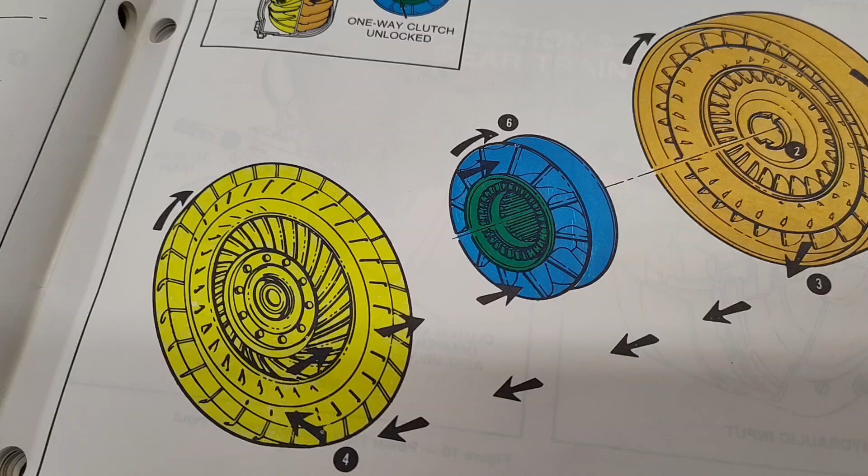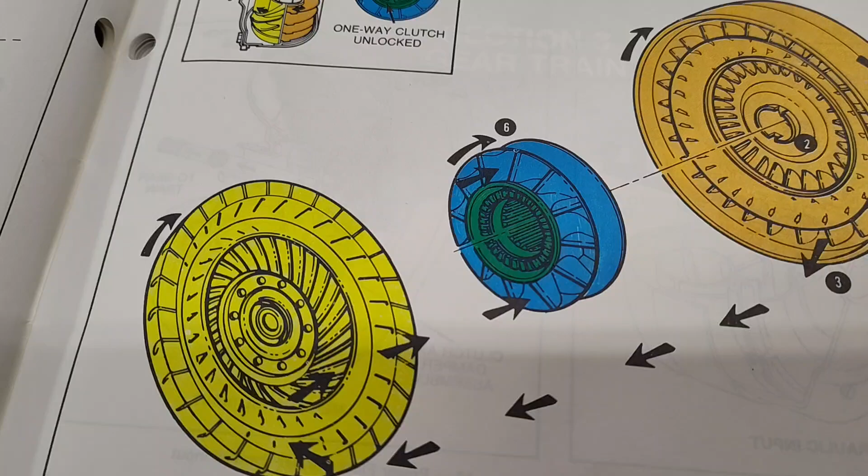This is a complicated subject, and I am honestly still learning things to this date. I did a little bit of quick math thinking about this. I was curious how many converters I've built to date. I don't know how accurate this is, but it's pretty close. I've built about 1,872 converters, which sounds like a lot, but it's not a lot compared to shops that just turn these things out, that's all they do. But I'm not just a converter builder, I'm a transmission builder, and I do valve body design and things. I do a lot of different things.

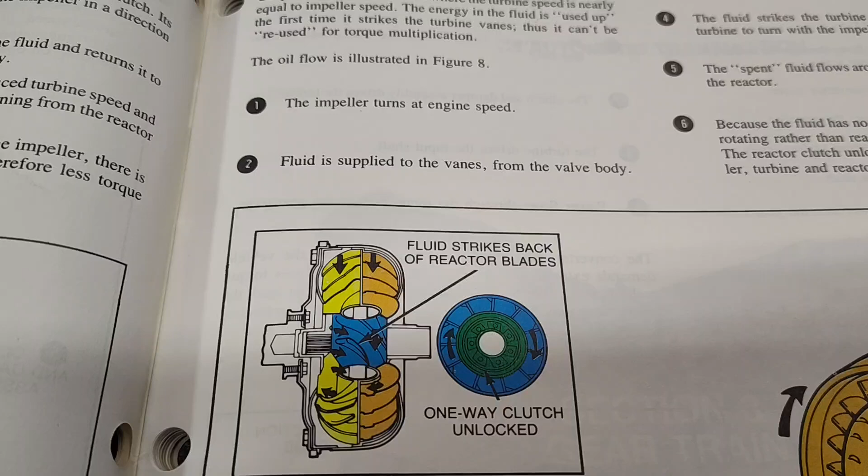Anyways, the point is, I think myself and many people in the industry are still learning. So there's going to be several videos on this as time goes on, but today we're going to focus on the fact that a torque converter is a fluid coupler.

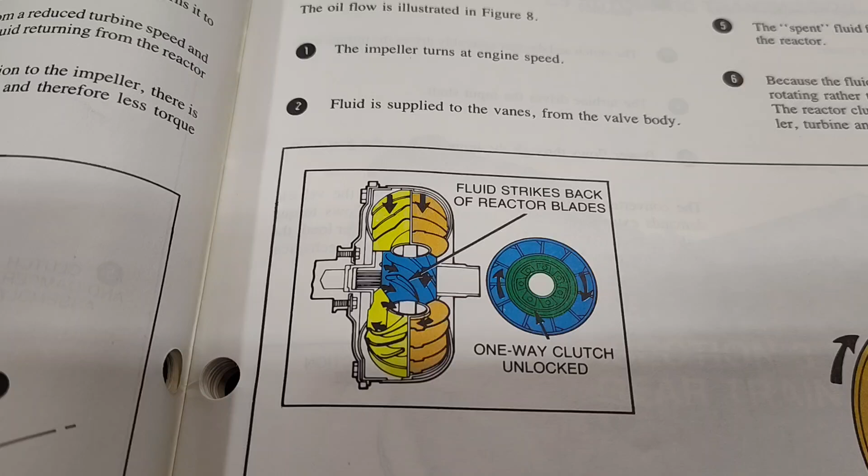So what that means is it's using the fluid to basically operate the torque converter. So what we have to understand is the fluid matters, and I'm talking temperature of fluid, viscosity of fluid, pressure of fluid within the converter.

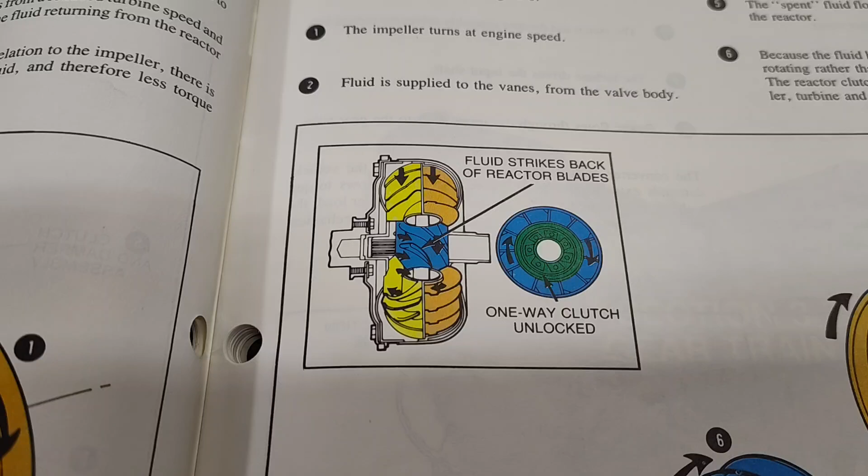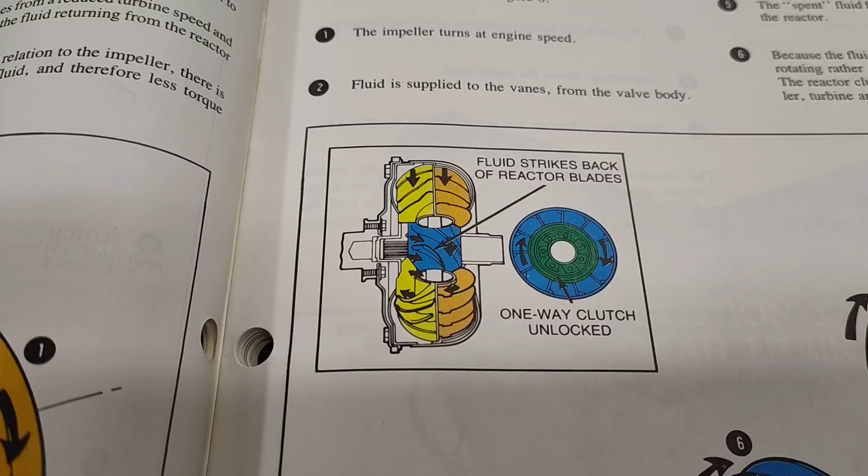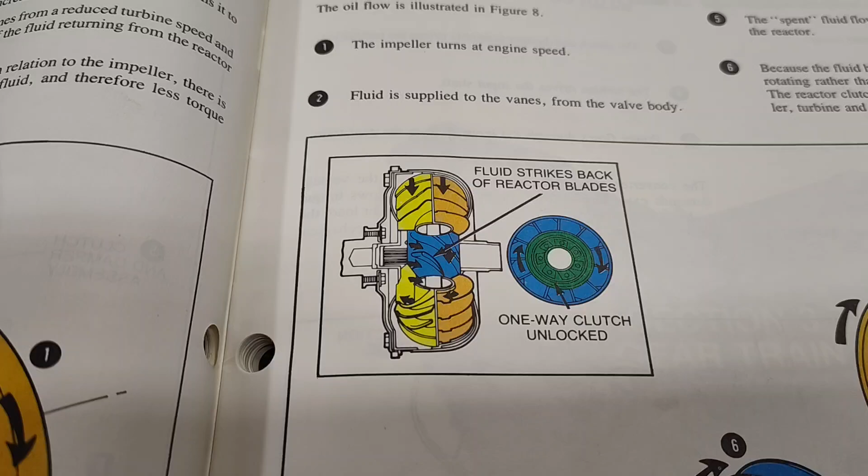All these things make a difference, and if you buy a torque converter from whoever, even if it's an off-the-shelf converter or a custom-made converter, one thing the converter builder doesn't really know in your special situation is most of the time we don't know what oil you're running. We can make a suggestion, of course, but we don't know what temperature your transmission's running at. We don't know what kind of oil delivery the transmission is providing to the converter. So there's a lot of variables that a torque converter builder has no control over, unless maybe they built the transmission and provided the fluid or a fluid recommendation, and also insist on strict temperature control.

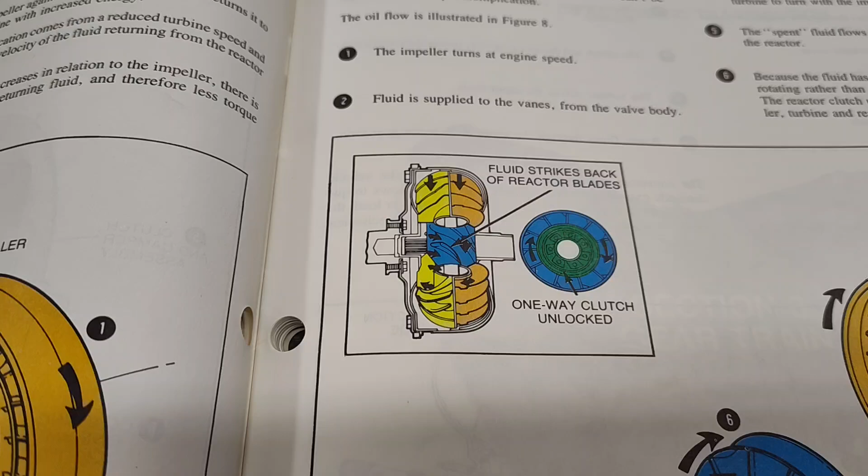That would be the only way to control all this, and none of us are really doing that. I mean, maybe some are, I don't know, but I never really heard of a person selling a torque converter and putting a lot of stipulations on things.

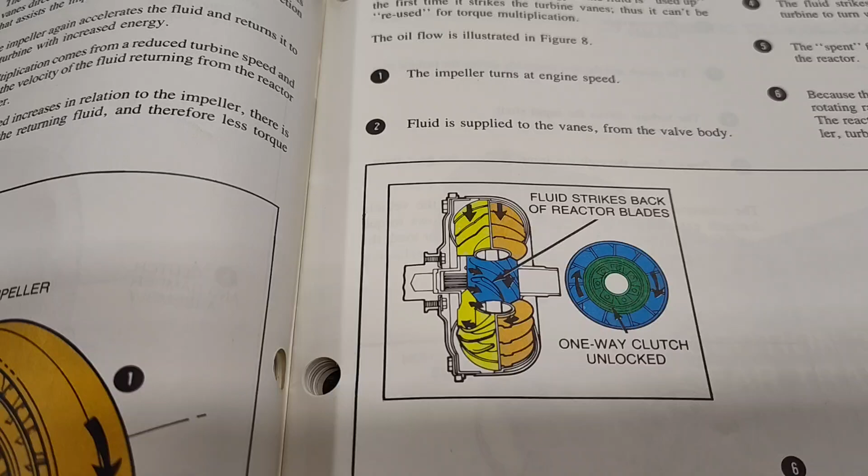I have heard of, and maybe you guys have heard of this, there's been a company or two that used to promote really efficient converters for drag racing, like 98% efficient or something, really high for a converter. They would advertise this, but what they'd kind of tell you on the back end is, look, you've got to have 100 PSI of pressure inside that converter in order to achieve this kind of efficiency level. And what's the reason for that? Well, that's what we're going to talk about today, because it's a fluid coupler, so the fluid matters.

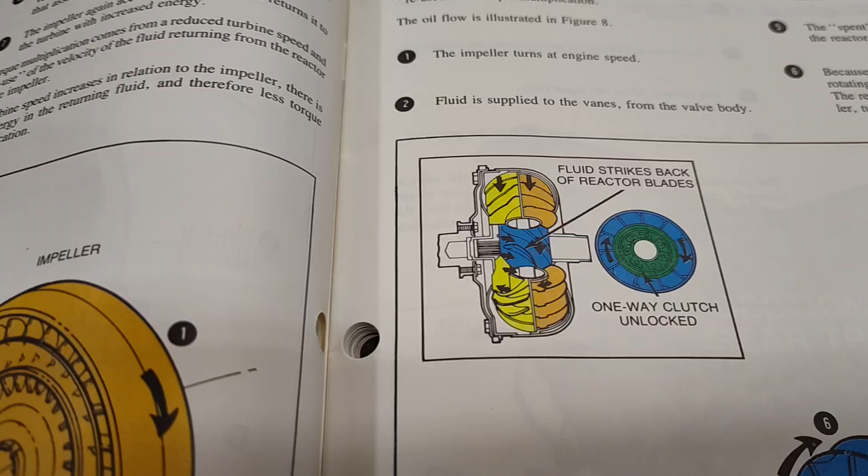And the thicker the viscosity of the fluid is, the tighter the converter is going to be, the more efficient it's going to be, the less it will stall.

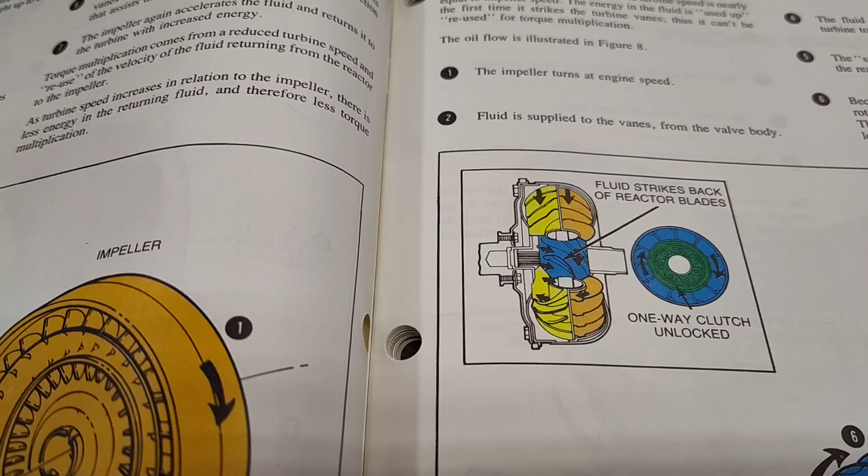I think one thing people don't realize about converters is, we talk about it's a 4,000 stall converter, or whatever it is, 2,500 stall converter. Well, that's a variable number. That varies based on the amount of oil that's in the converter, the pressure, the viscosity, and also very much so with torque load that's on the converter. That number, the stall number, I don't know that we should talk about them like that anymore.

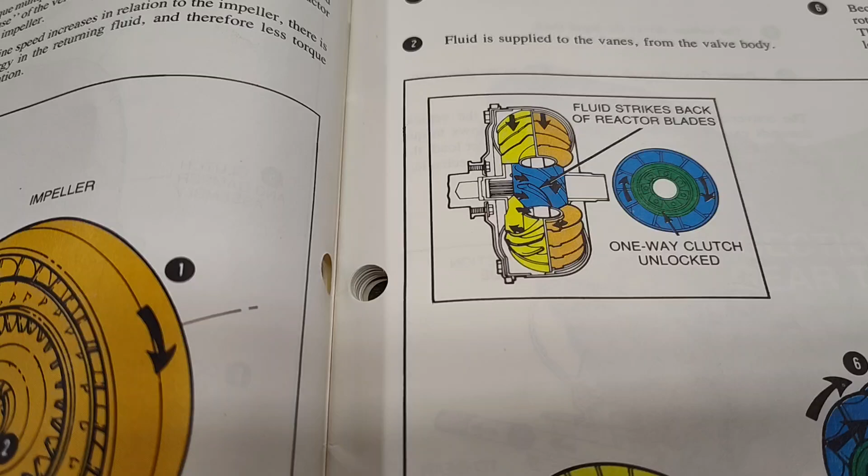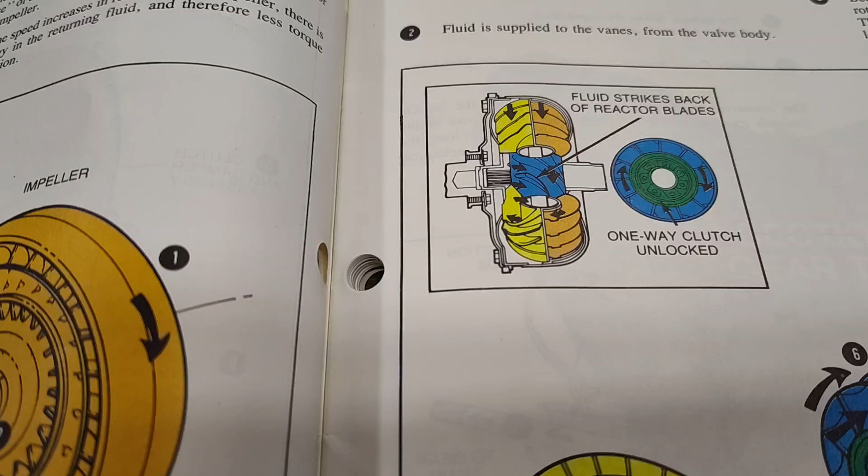I kind of don't look at things like stall so much on the back end. That's what customers look for, that's what they know to check. It's sort of easy to measure on the vehicle, well actually not that easy, but that's what people get obsessed with, is what the stall is. On the back end, I think of it more as surface area, the type of pump, the type of stator, the clearance that's in it. I kind of think about things a little differently.

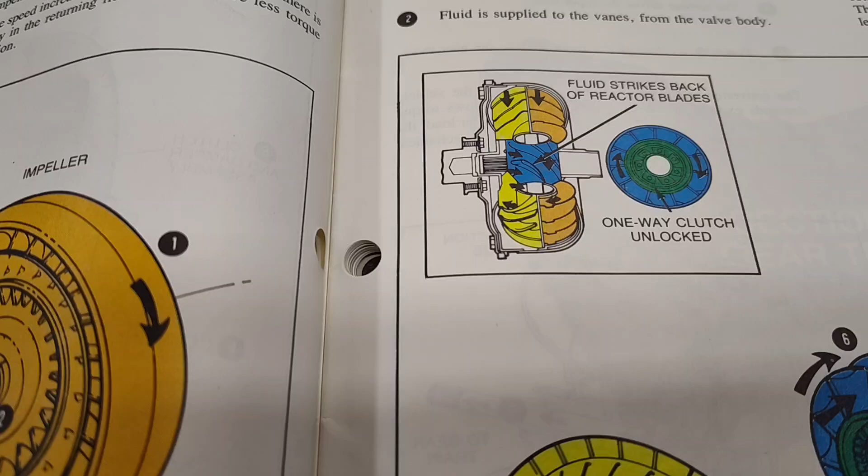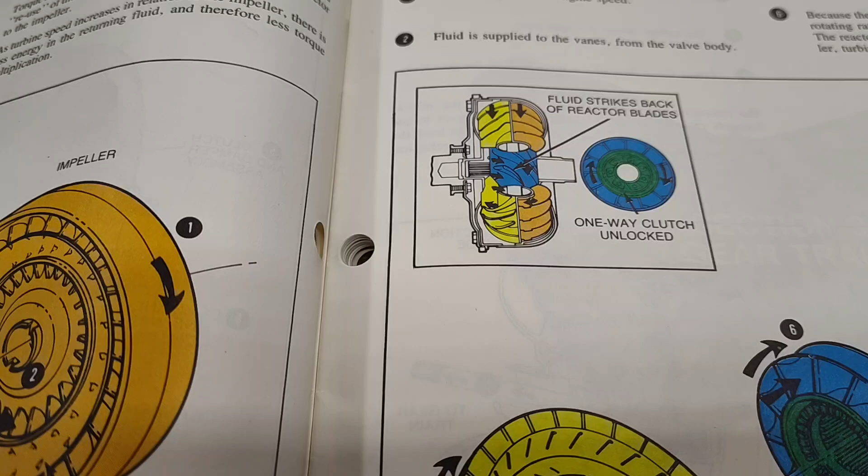Personally, I don't get obsessed over a stall number. I have customers sometimes that put a converter in, whether it's mine or anybody's, and they'll trans brake the thing in the driveway, and say they want 4,200 and they see 3,800 on the tachometer. Nope, no good, I'm pulling it out, it's going right back to the guy. To me, that's not really the way to do it.

And this is such a long, complicated subject, so I'm going to try to stay focused a little bit here. Let's talk about the oil delivery within the converter today, and just kind of focus on that.

So occasionally you'll get a customer that will say, well, the converter's not coupling, it's not acting right, it's this, it's that, it's building a lot of heat.

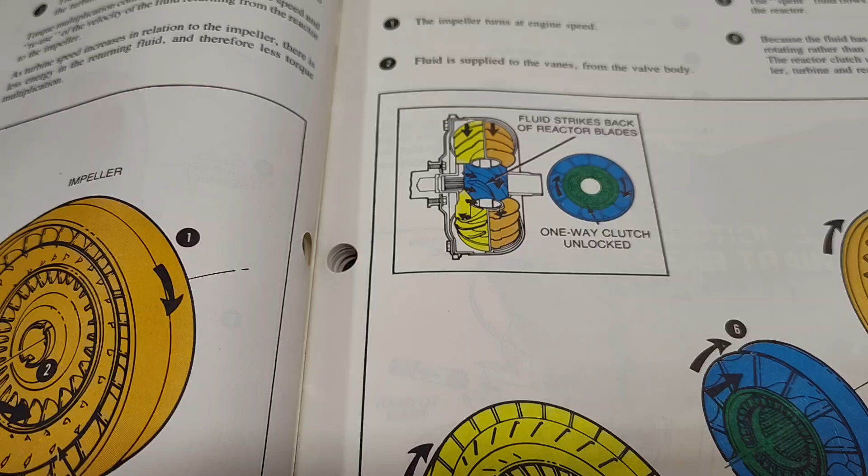They just have a lot of problems, and you can't seem to satisfy the situation. No amount of restalls, or even sometimes different converters, just make little to no difference. And I believe that occasionally what we run into is an oil delivery problem. We're not filling the converter properly, so it kind of gets air pockets and things in it, and it becomes aerated. This can happen, and it's not all that uncommon.

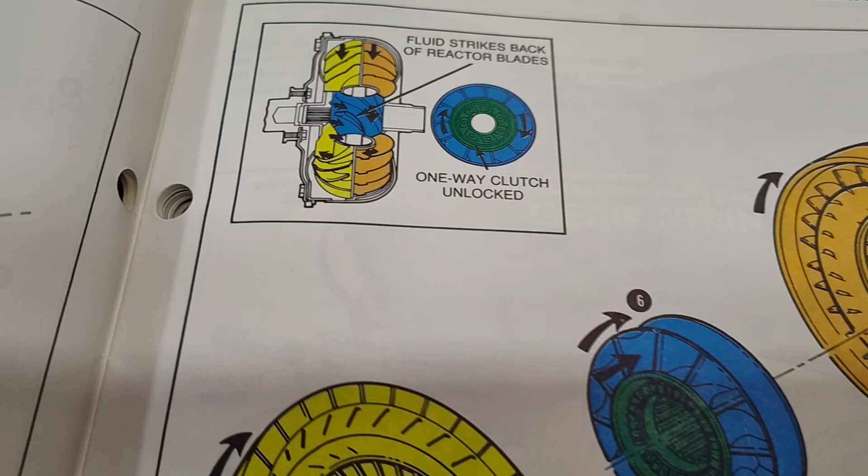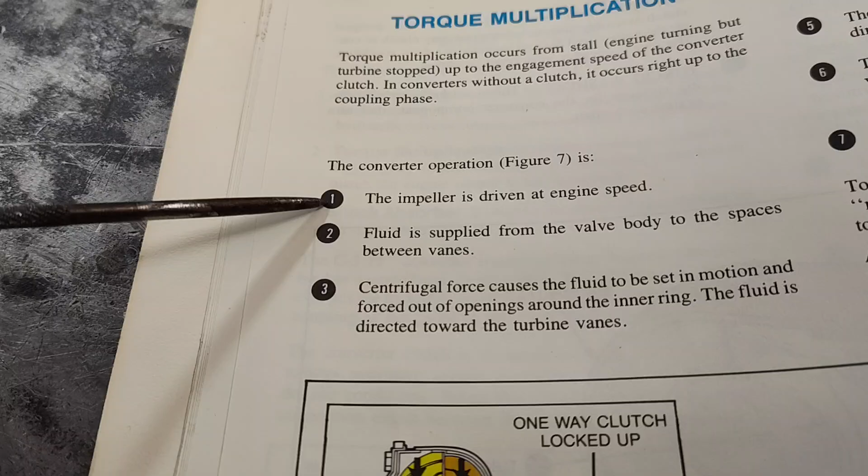So just to show you something real quick here, this is a cool little diagram. Let's see, so if we kind of go through here, it's got these bullet points, 1, 2, 3, 4, 5, 6, 7. And if you refer to the diagram here, you can see 1, 2, 3. So it's explaining at these points inside the converter what's happening.

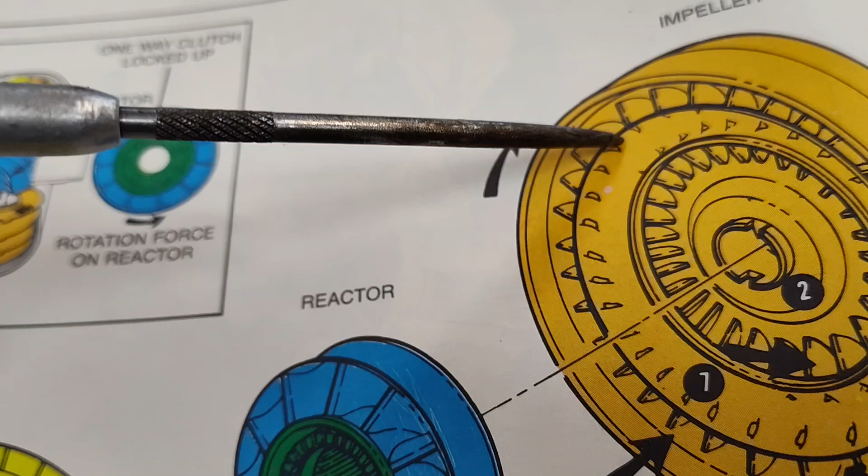So number 1, the impeller is driven at engine speed. So this would be the impeller, I call it a pump. This is basically driven by the flywheel, and this starts to pump the fluid.

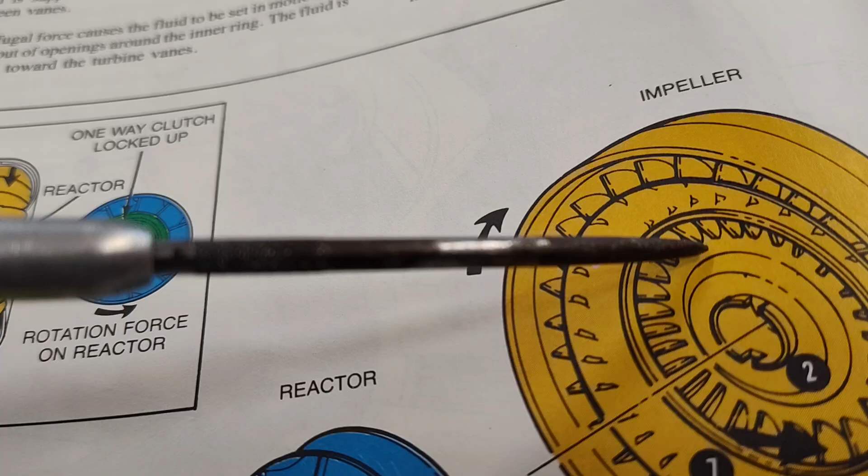So what I want to point out is, number 2, fluid is supplied from the valve body to the spaces between vanes. So in this area, this is the intake of the pump, and we'll listen to what they said very carefully: fluid is supplied from the valve body. So this is where it all starts. The valve body needs to supply an adequate supply of oil for this pump to take in.

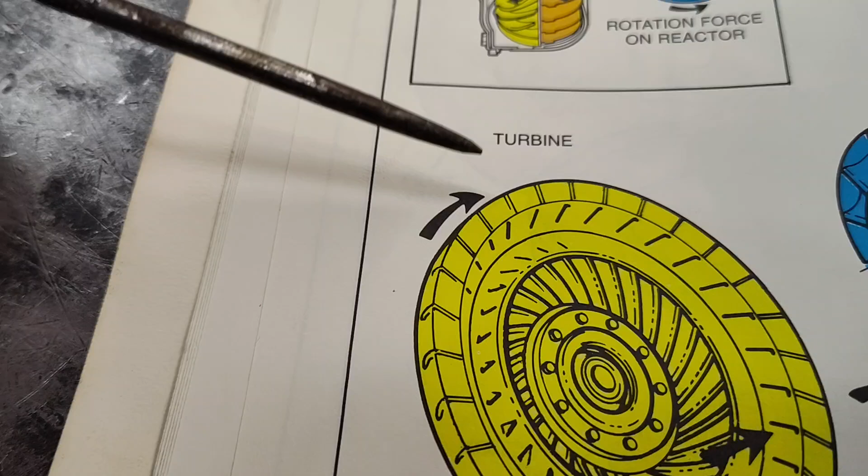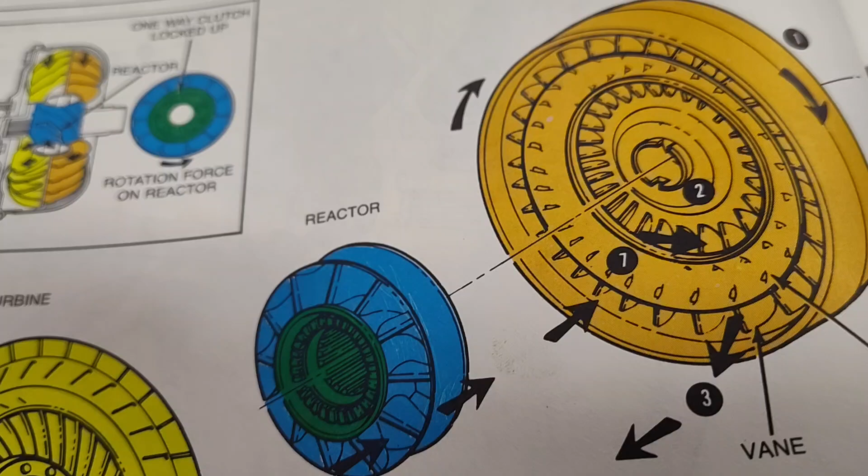And then the oil is going to come through, get pumped out the outside of these vanes, and come into here, into the turbine. This is what is actually coupled - the input shaft couples into here. This is actually what drives your transmission and moves your vehicle. Oil comes in through here, comes out through the inside, and then goes through what they call a reactor, I call it a stator. Either is correct, whatever your terminology is. Then it returns back into the inlet of the pump, or the impeller, as they call it here. Just a bit of a quick overview of where the fluid is flowing.

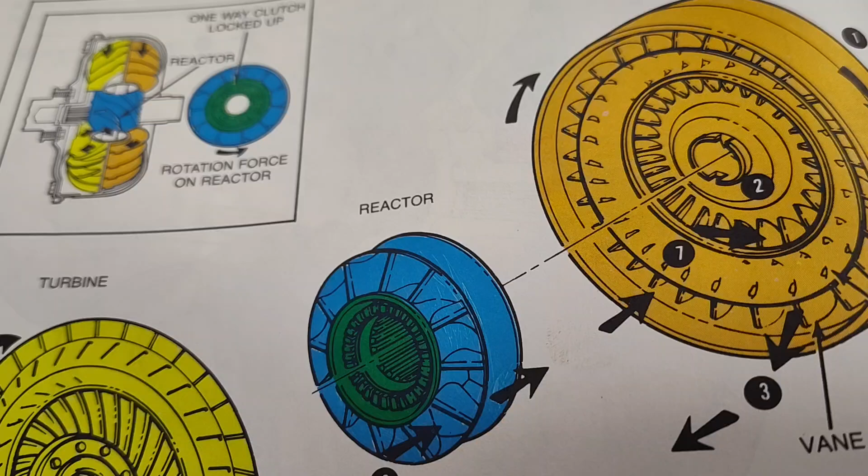But what I want to focus on today is not so much that stuff - I want to focus on the valve body delivering oil to it. And what we also have to understand here, this book is not talking about this, but the oil is also leaving the torque converter and goes to the lubrication system of the transmission. So we have oil leaving the converter. So if the valve body is not able to deliver enough oil under pressure to fully fill the converter and pressurize it, the converter is just never going to work properly.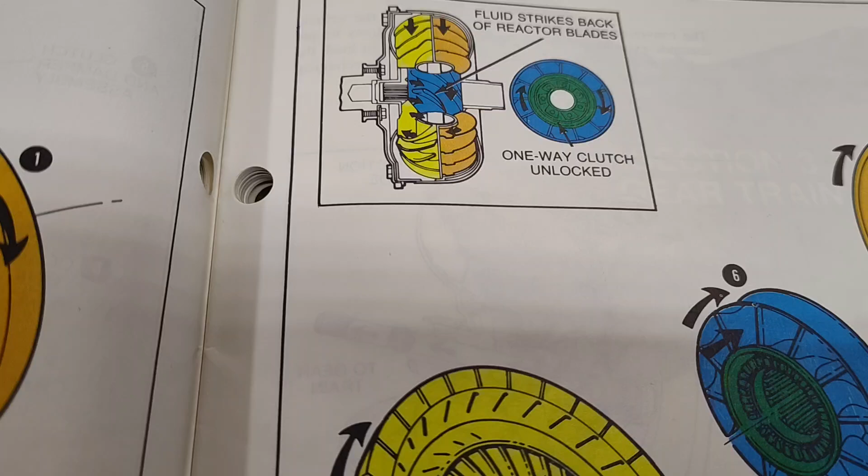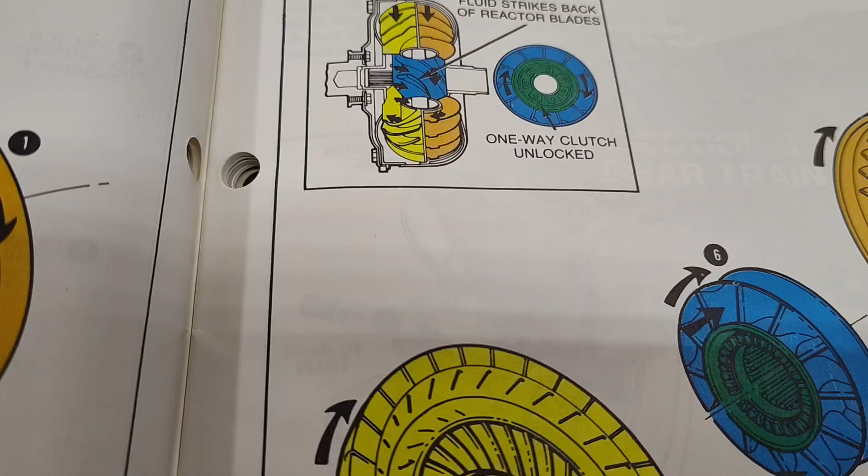So it wouldn't really matter who or where or what converter you bought - some will still work better than others in that situation, of course, but to take advantage of any torque converter, you need to have a good oil delivery system. And I don't think anybody ever really thinks about that. I'm sure some do, but I think the majority of people just kind of take it for granted. So we're going to talk about that a little bit today.

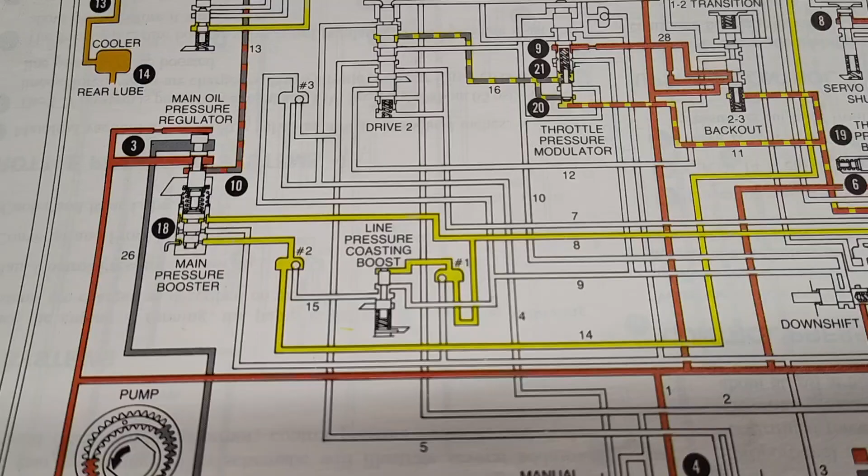So give me one second. Let's look at this hydraulic circuit. All right, so what we got here - now, I don't care what transmission you're working on, this circuit is of a C5 Ford. But it doesn't matter if you've got a Turbo 400, a Powerglide, an AOD, or whatever transmission you want to talk about. We're just talking generics here today. Things are all basically the same.

So you have a pump - every transmission's got a pump. And so it takes oil in, and this red line here is the oil coming out. So what happens is you have oil going to the base of a pressure regulator valve. This oil is actually what moves the pressure regulator valve and regulates the pressure, okay, that's what this is for.

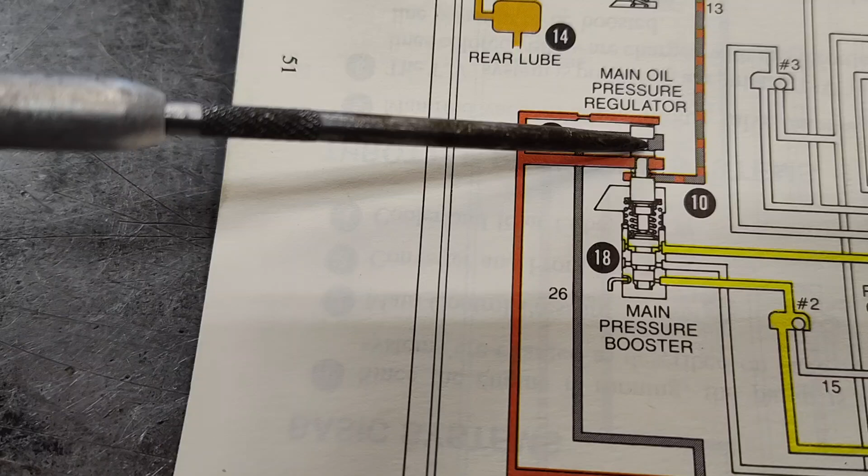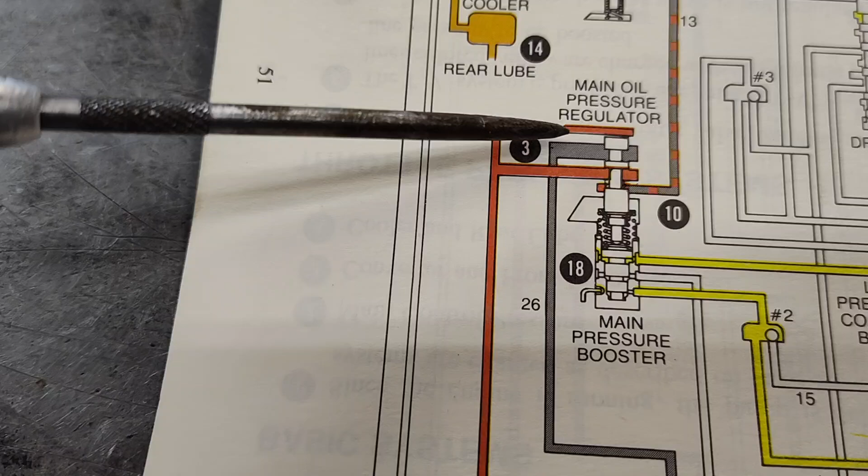And you can see a little restrictor here, and the reason that's restricted is so that you don't get rapid movements and oscillation of this valve. So the valve kind of opens and closes more smoothly - that's why we choke that down. If you had no restriction there, this valve would tend to just kind of knock around and you'd see your pressure gauge bouncing around a lot. I've seen units like that and I've fixed them by putting more restriction here. Sometimes you'll even hear this valve rattling and making noises if you were not to have a restrictor there, or the proper size.

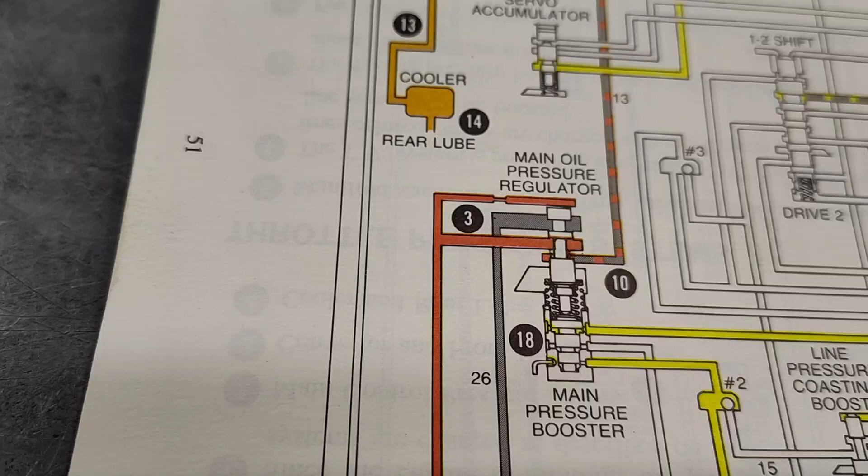So what happens here, your oil sits here, comes back over, and starts pressurizing all your circuits to your clutches and everything else. So if you have internal leakage inside your transmission that you wouldn't necessarily be aware of, and you wouldn't necessarily know from the pressure gauge a lot of times, if there's excessive leakage inside the trans, you'll starve the system of oil that goes to the converter and lubrication system. The way this valve is designed, when it's closed, it's allowing all the oil to go and satisfy all the clutches and circuits. Then once everything is satisfied, pressure builds up and this starts to open.

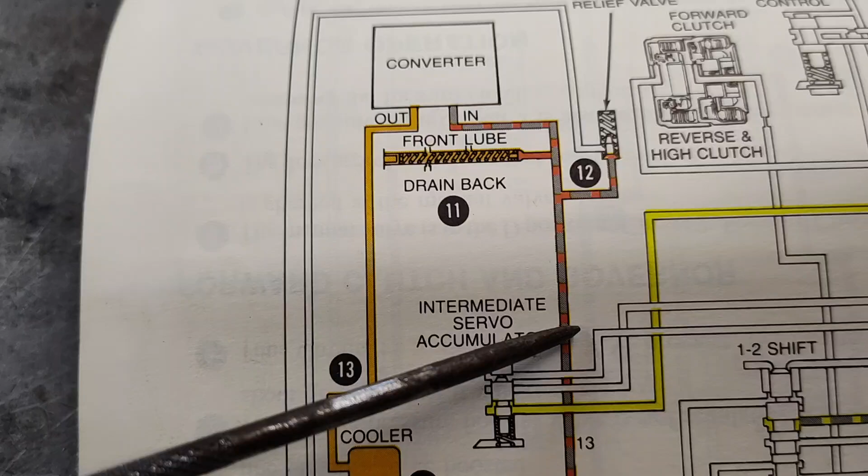Oil pressure will start to crack. You see this regulated pressure here, it will start to crack into this circuit, and then this comes to our converter and lube circuit. So this is a converter pressure relief system.

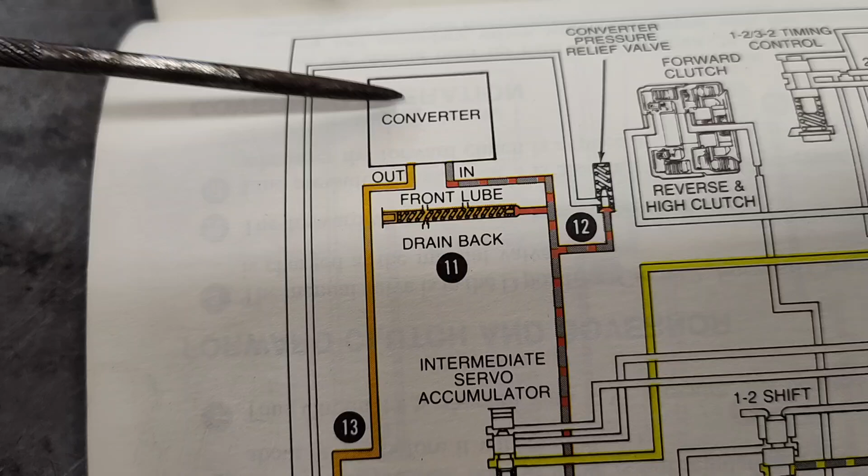This is so the converter doesn't get over-pressurized. It's a safety circuit. Some race units, or even some stock units, don't have this. So if the cooler or something gets plugged up, it can overpressure the torque converter, and it can lead to things like converter ballooning, or premature failure of the thrust and crankshaft. That's another thing we'll talk about another time.

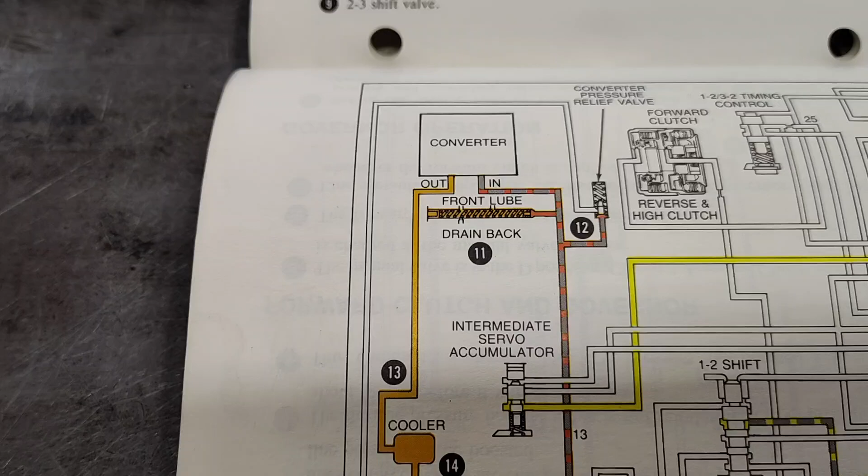You see a lot of units, typically Powerglides, Powerglides with the aftermarket shafts and things can be very restrictive, and they make a lot of pressure inside the torque converter, and they will just wear out your thrust on your crankshaft and just be killing engines. A lot of guys have experienced this. I've fixed a lot of glides that have had this problem. It's very common in glides.

So this unit here has a converter pressure relief system. Most of your Fords do: C4, C5, C6, AOD, these all have converter pressure relief circuits. So the oil comes in. Now you also have this, you'll see, this is a front lube circuit. So you're losing some oil here also before you get into the converter.

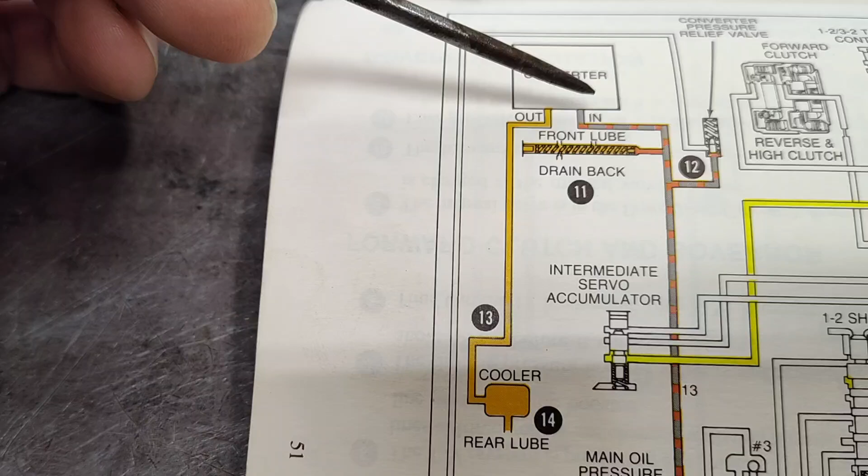So you come in, you fill the converter. Here's another important factor that we'll talk about in another video -- again, this is several sections of video -- but oil has to come in the converter and then leave the converter. And there's a lot of theories.

Guys kind of have their own recipe. Some guys don't think about this at all. Other guys I know allow good oil flow into the converter, but then they restrict it coming out a little bit in an attempt to keep the converter full and keep pressure in the converter. These are converter builders that understand this fill circuit, and what they're trying to do is protect themselves so that when they send a converter to a customer who may not have the ideal oiling system, their converter will still work pretty well.

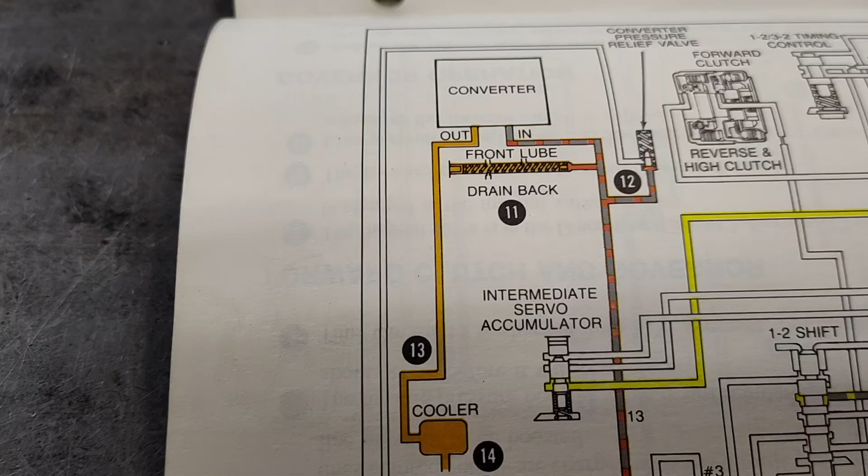That all the oil pressure isn't just going to be dumped out of the converter, and the customer is going to say, man, what's wrong with your converter? It doesn't work worth the crap. It doesn't couple, it doesn't act right, it's just this and that. So they're trying to protect themselves there.

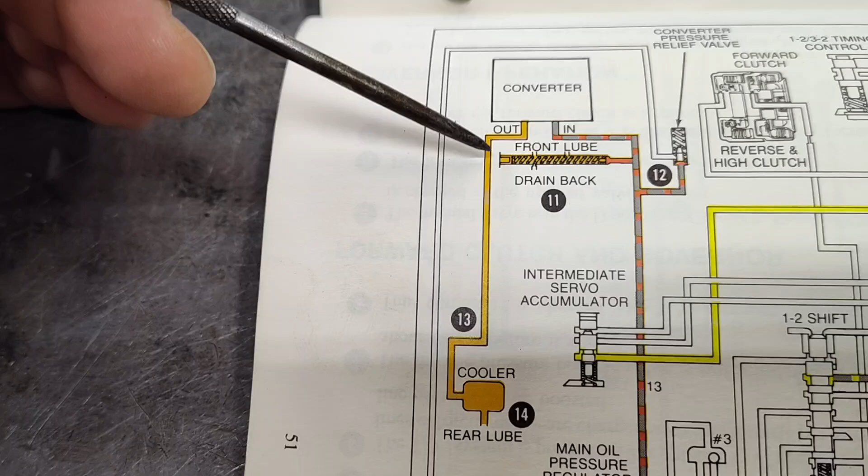Because again, when we send you a torque converter, we do not know -- I mean, you can say, hey, I got a C5 transmission. Well, that's good, but nobody really knows what that oiling system is like. Did you modify it? Did you not? Do you have unusual leakage? What's your cooler like? Is that restrictive? Your lines? There's a lot of things that we don't know.

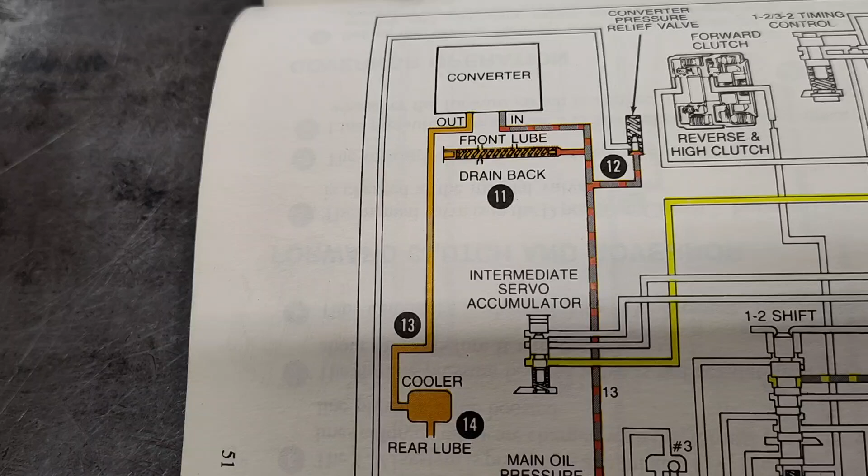And the only way to really know is to put pressure gauges and flow meters on your car. I do these things on units that I dyno so that I'm controlling it on that end, but I'm not controlling all the installation differences that can happen. So that's another thing you don't see. But again, I'm getting a little bit off topic.

So then this comes out, goes through the cooler, and then goes through the rear lubrication system. So what can happen? You cannot fully fill the converter. You can have oil flow going to it, and it may not be enough. It may be just dumping out through the lubrication system too excessively to come in and pressure the converter.

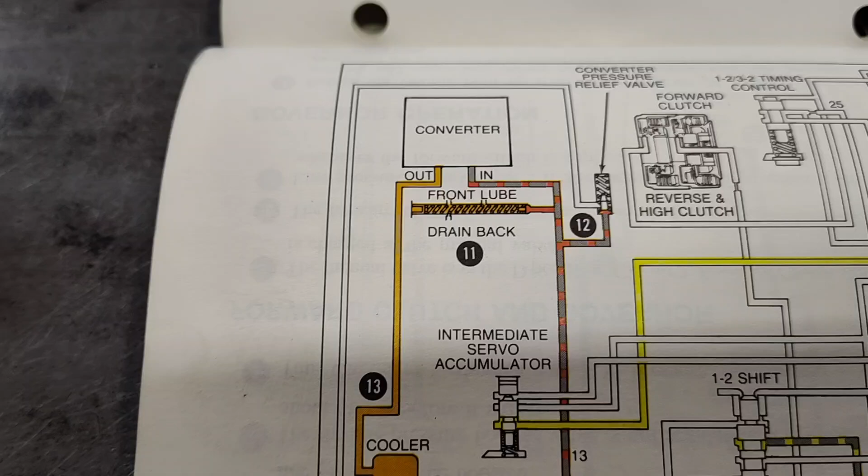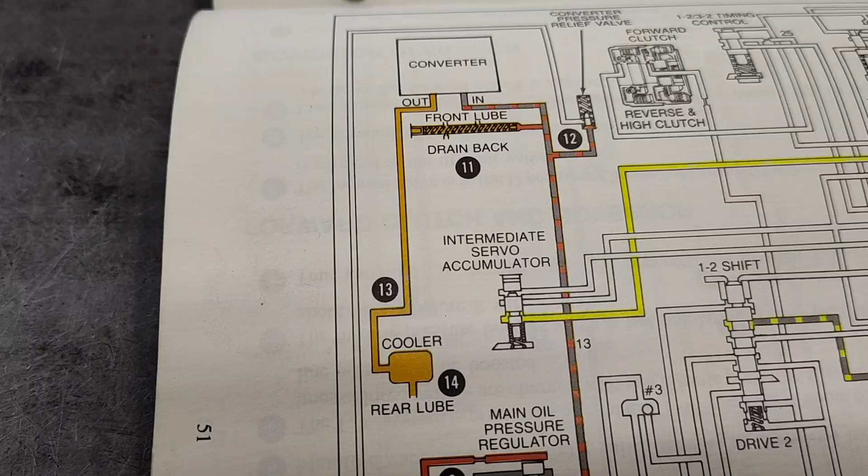Now, I gave the example of other companies saying that they wanted 100 psi of back pressure in the torque converter, which I think is excessive, especially with a Ford with the larger hub, but that could prematurely wear the thrust out in your crank. But in a max effort race engine where the engines maybe don't last that long anyways, maybe this is not an issue.

I didn't come up with this number, but a friend of mine felt like 80 psi was about the most you would want to see inside the converter before you start really putting excessive force on the thrust of the crank.

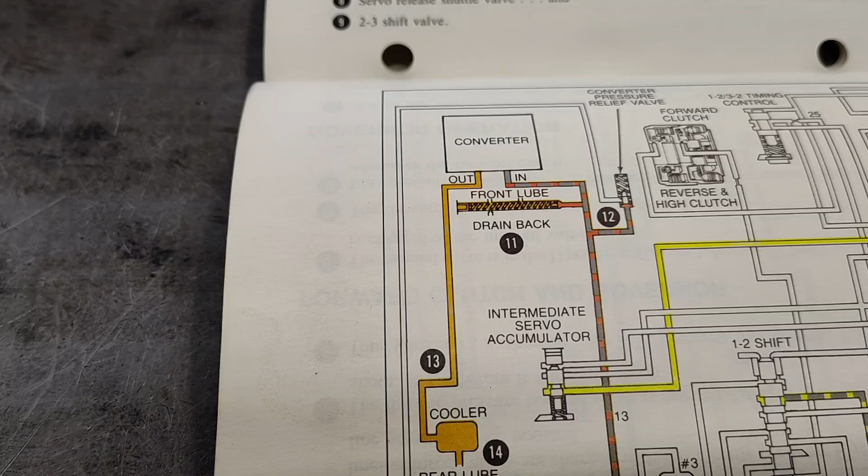He's primarily a GM guy. Those hubs are a little smaller than a Ford. Maybe in a Ford we want to be looking more like 70 psi, I'd have to do the math on this, but I'd say as long as it doesn't go over 80, you're probably going to be okay. But I've seen units that are just cranking Powerglides in general, pegging pressure gauges at 150 pounds, just way too much oil, and they're very quickly killing the engines.

Something to watch out for, and what you can do to make sure you don't have this problem: tap a pressure gauge into your outlet line before you get to the cooler, and just make sure you don't have crazy pressure there.

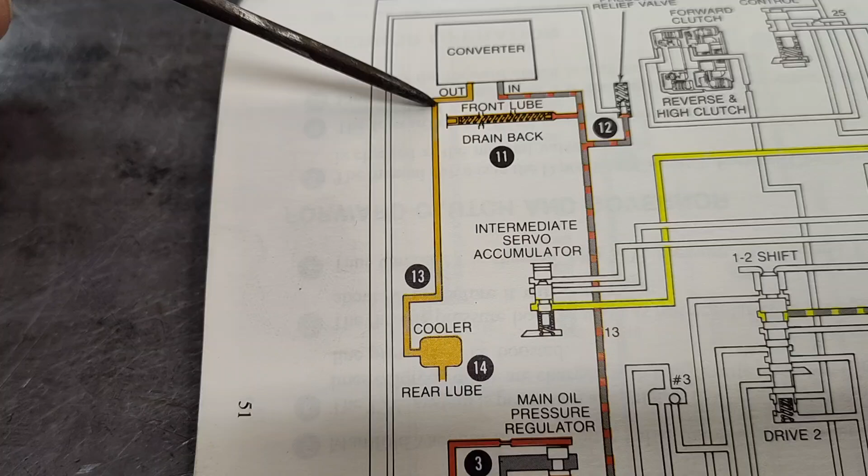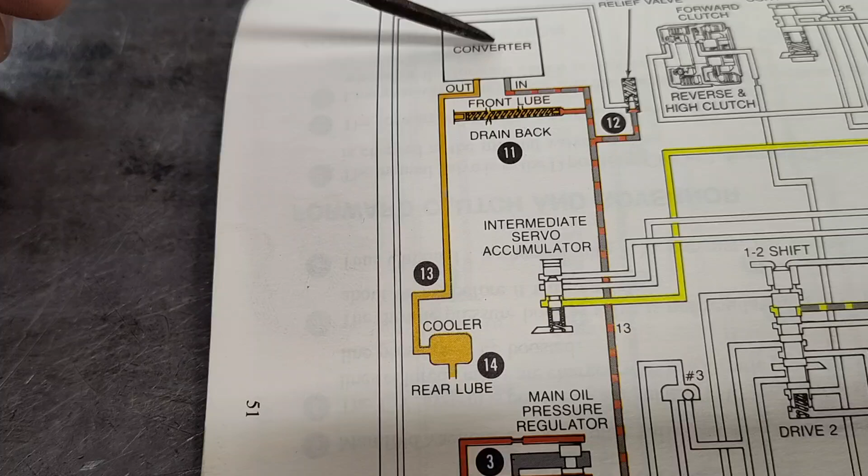Now, that does not mean necessarily that you don't have a restriction inside the torque converter or inside the pump. So the restriction could be back here somewhere, and you've got a pressure gauge here, and this rear lube and cooler flow very well. You could actually see very low pressure here and think you're okay, but the pressure inside the torque converter is actually very high because you're not actually measuring that. You almost have to know that within the converter and in the pump circuit that you are nice and open and free to trust this pressure gauge reading.

But you kind of can. So, for example, let's say you're killing the thrust in a crank. Your pressure here could be really low because it's all trapped in the converter. But again, I'm kind of getting off topic. I'm sorry, but I should script myself better, but I don't do well with a script.

Basically the point I'm making here is all of this is important, and we need to know these things.

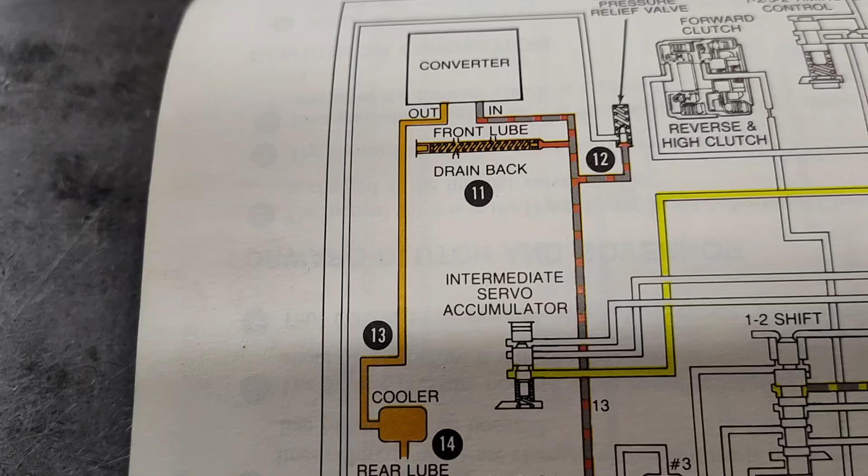Now, let's look at a valve body here. This is a prototype design that I have. I'm using this because it's simple. So right here, this area here, is what you're seeing. This is where the oil comes in and pushes on this pressure regulator valve, okay? This is the pressure, the oil pressure that comes in and goes and feeds all the circuits and everything, okay?

So this valve is all the way closed right now. I know it's hard to see. I'm going to stick my pick in here and open this. You're going to see right away, I don't know if you can, I'm going to try to point to it. You see the valve is cracked open here. This little leg here feeds our torque converter. So after clutches are satisfied, then we crack open and fill the converter.

Now, here's another phenomenon that can happen: high RPM and making a lot of oil flow. Here's another instance that could potentially be going on. What happens is, as more oil flow and pressure build up, this valve will open further, and then look what happens here. Now we have good opening going to the torque converter, but see, now we're open down here, and we're dumping off into here.

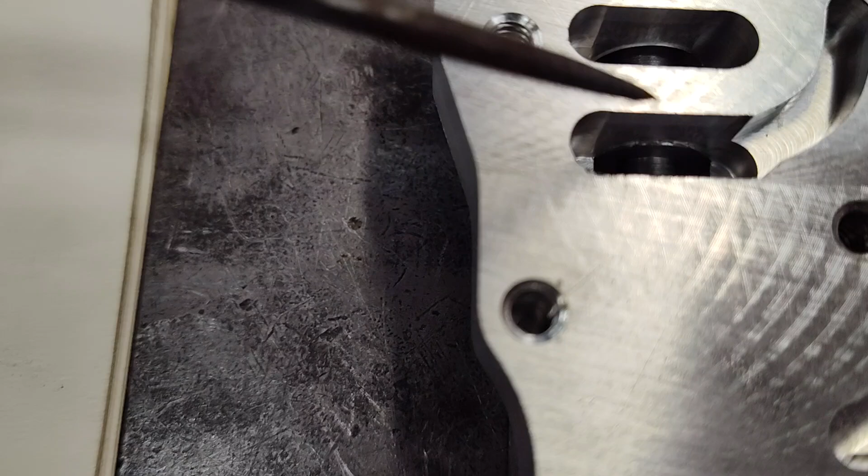Here, we actually have a little bit of negative pressure happening from the pump trying to suck oil up. So the oil is going to say, I like coming through here better, path of least resistance, right? You've heard that a lot with electricity or water flow, oil flow, airflow, whatever. Path of least resistance. So when this valve opens enough, this can become a path of least resistance, and this can destroy our pressure and flow going into the torque converter.

So this is something that could happen at high RPM. This could be happening to you. Maybe it's working great up to 3,000 RPM or so, but once that pump really gets rolling, you know, 5,000, 6,000 RPM or something, maybe we're actually at that point starting to lose pressure to the converter.

And so I already know what you're thinking. What do we do about this? How do we know if this is happening or not? And on and on and on. Well, this is where life gets complicated. And please, for the love of God, don't start sending me a bunch of emails about how to modify these circuits and all these things. I'm so overwhelmed with this stuff.

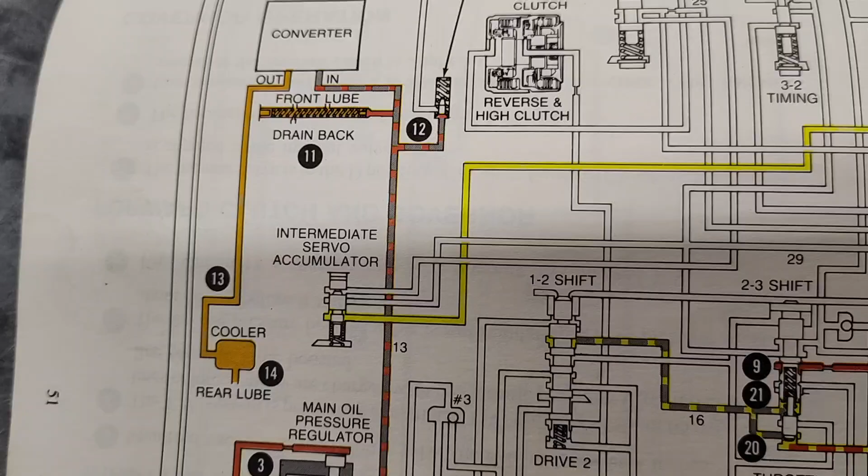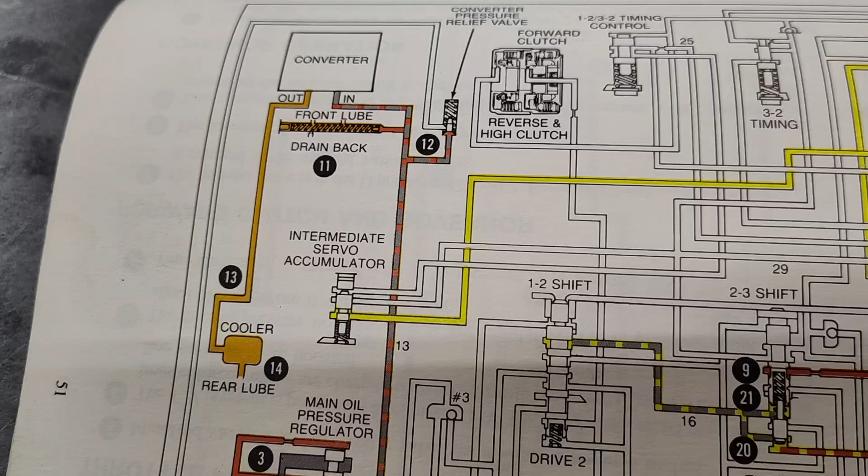How much pressure do we need? That's kind of controversial. The more pressure you put in a converter, the more resistance it has, so that's going to make it tighter or more efficient, if you will. But because you're adding resistance and friction in the converter, it can also make it heat up more by putting a lot of pressure in it. Which could be an issue for something that's on the street, probably not an issue for just a quick eighth mile or quarter mile run, then you're sitting around waiting for your turn again.

But if you're getting to do back-to-back passes and things, maybe temperature can become an issue, possibly. So there is definitely, I would say, the more pressure you put in the converter, the more efficient it's gonna be, but it's also gonna lower your stall too, so you don't really want to have too much pressure in there.

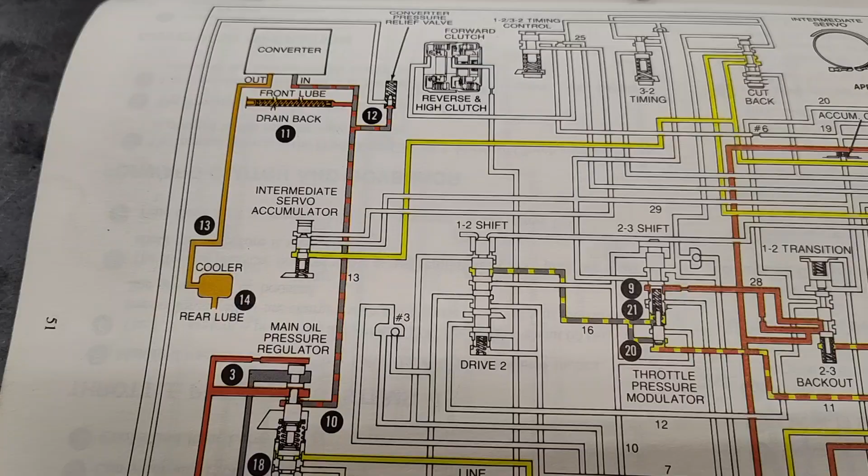And again, I spent a lot of time talking about the thrust surface on the crank, so we definitely don't want to have that issue. When you're talking billet racing converters, they don't really balloon, but stock ones that are kind of thin, those will balloon. Billet racing converters just pretty much don't. You'd have to have serious pressure in there to have an issue with that.

But anyways, we want to get oil in the converter, and we want to get it out of the converter. We want to have a good pass-through of oil in it, because the oil very quickly gets heated by the torque converter. So we want to get that hot oil out of there as quick as we can. And again, that temperature of that oil changes the viscosity of the oil and its coupling ability.

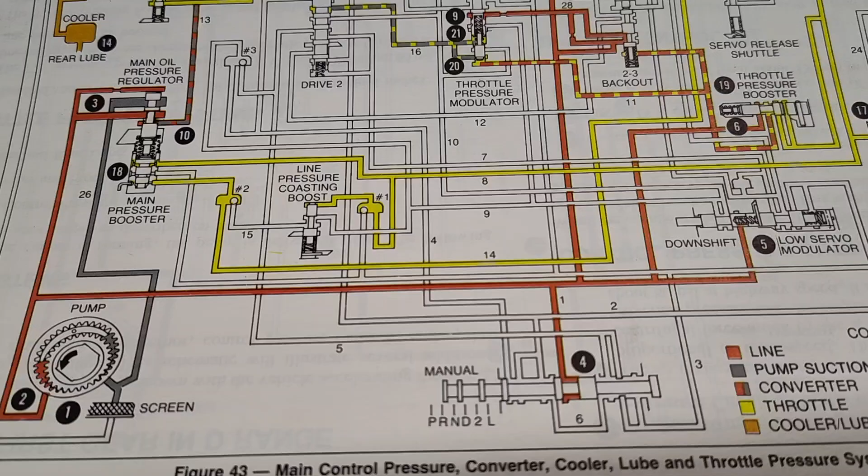So, for example, if you have a trans brake, you can notice this on foot brake as well, but trans brake's easier. I've had this happen to me. Let's say a customer wanted a 4,000 stall, for example. They get in the car, they put the trans brake on, and they floor it. Tach jumps up to 4,000. A second later, it's at 4,200. Then it's at 4,400, then 4,500. You'll see that the stall will just keep climbing. And the reason for that is the oil's getting hot.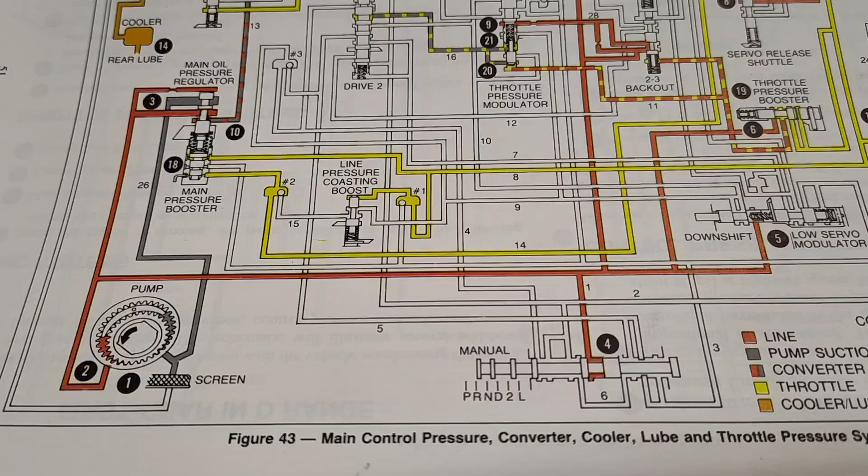And the oil's getting thinner. So the thinner the oil is, the less efficient it is, the less efficient the torque converter becomes. So if you sit there on a brake for several seconds, and you've heard of this, guys with turbos and things trying to get them to spool, they'll sit there on the trans brake for way too long, because you really only want to be on a trans brake for a few seconds, because you're just going to cook your transmission.

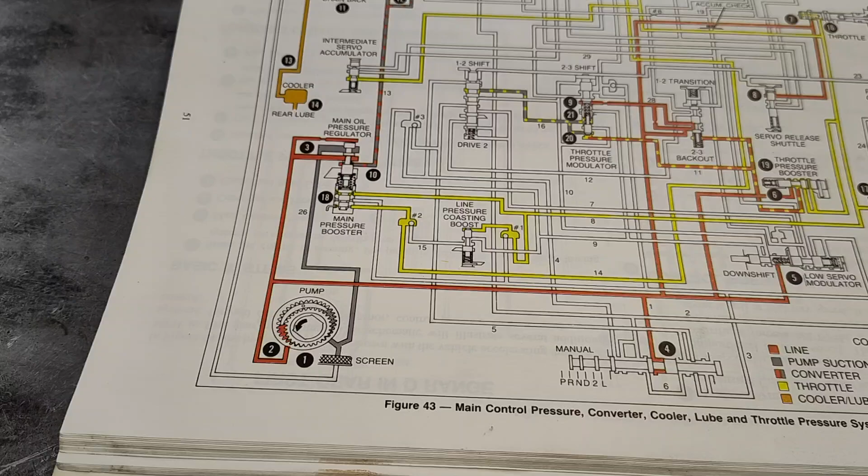You're just making tremendous heat when you're on that trans brake like that. But you can sit there for 20 seconds and, whatever, you wanted to stall at 5,000, it stalled at 4,000, and you can sit there and spool up your turbos and heat your oil and get your RPM to climb up to that. But man, you're going to cook your transmission. That's not a good scenario. We really want to be up to that, whatever your goal is, a lot quicker and closer, because you want to be off that brake ideally in 2 or 3 seconds. You could turn the brake on, but when you're at full throttle, you want to get off that brake as quick as you can, because you're going to cook that transmission.

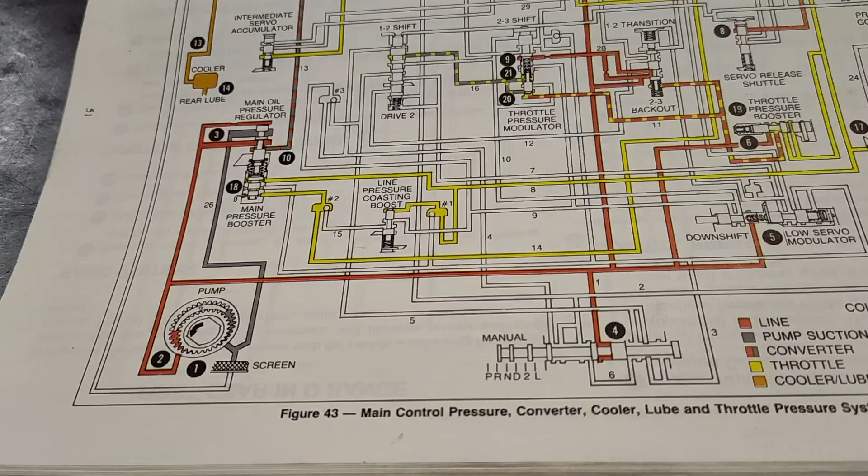I've had transmissions come in here that are cooked, and people are bad-mouthing the guy that built it up and down. 'Oh, this thing doesn't last, what the crap, the guy doesn't know what he's doing.' And you dig into the situation and you realize that, man, the guy did a good job. It's just they're cooking the oil in this thing, and they won't run a temp gauge and this and that. And that's an issue. Your trans is never going to last if you're doing that.

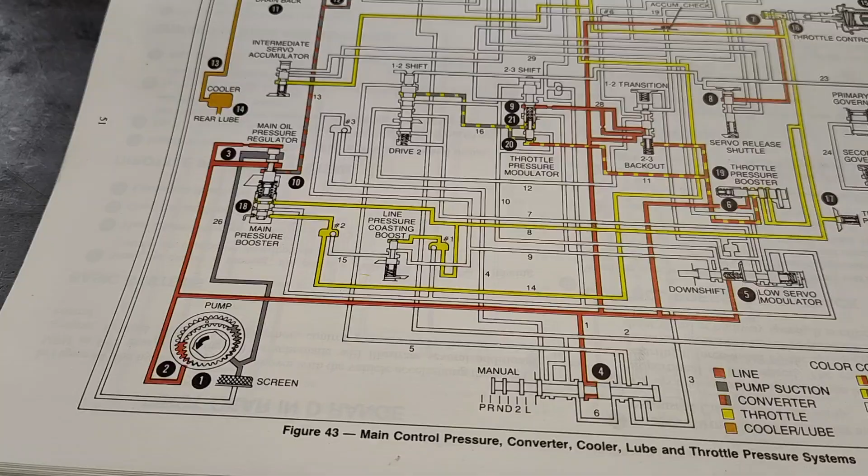So you got to get the right converter, you got to get the right stall, and your tune on your engine. Turbos these days, they run higher compression with them now, and they spool a lot quicker. They work a lot better like that, from my understanding. I'm not an engine guy, but with the higher compression engines now, this is not as much of an issue as it used to be.

These guys kind of have these things down better now, where they'll spool up a lot quicker, and they're not sitting on the trans brake for a minute. And if you're having to do that, you got to change something. Start with playing with the engine.

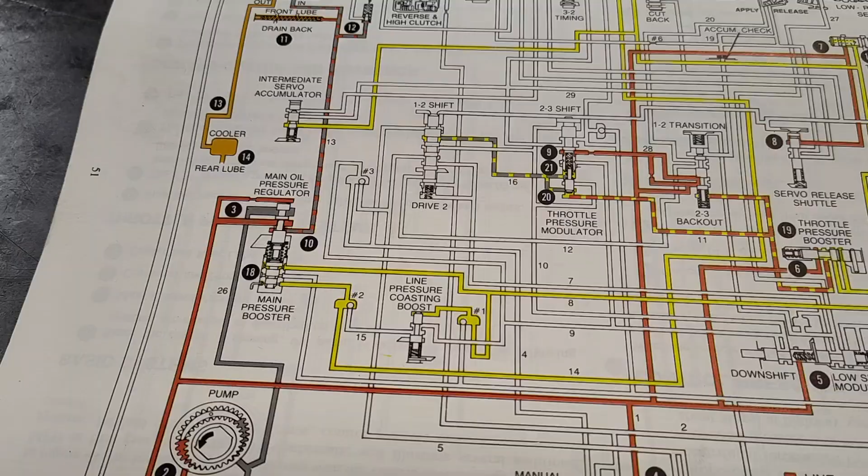We were talking about power. I get this a lot: 'Yeah, converter's working good, but man, I noticed I've got more stall than I used to have.'

Car's running really good and everything. I'm not complaining, but the stalls kind of come up. What's up? Do these things kind of break in and loosen up after a while?

No, not really. Maybe if the fins are starting to get bent and things like that, but that shouldn't happen. What is happening is you're making more torque, getting the engine more dialed in. Maybe it's the weather, you're getting later into the season and nice dense air is coming in and the motor's just making more power. That's generally what's happening, not so much the converter breaking in or anything like that.

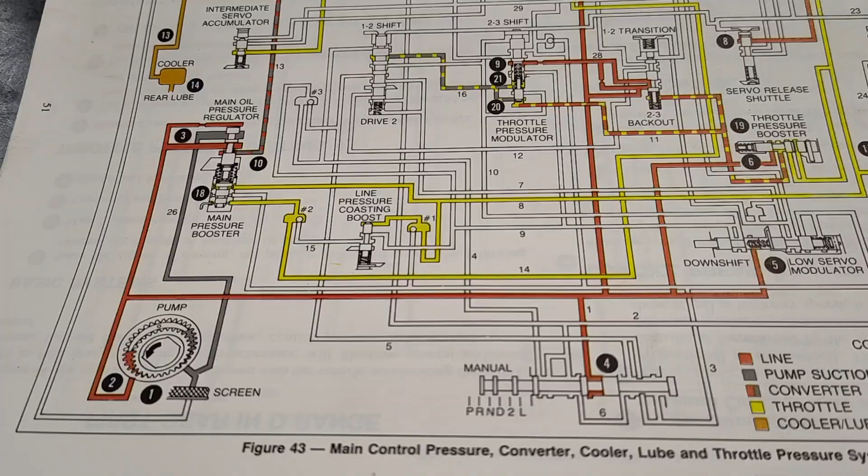Another question I get a lot is, oh man, something happened to the converter. Oh okay, what happened? Well, I used to have 3,500 stall, now it's only barely stalling 3. They don't generally tighten like that.

You're losing power. Oh no, the engine's running good. Well, I understand it turns on and it's loud and it sounds impressive, but you're losing power. No, it's just losing stall. I'm telling you, something's wrong with the converter.

Can't tell you how many I've had to cut open. Cut it all open, oh man, nothing's broken, everything's fine. You're losing power, I'm telling you. And then they find out the engine's losing power. It's generally the only reason that the torque converter starts tightening up like that, that I'm aware of.

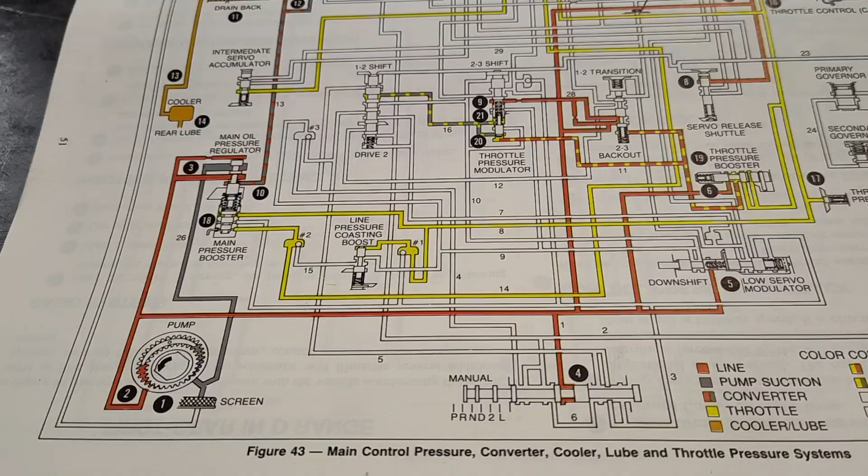So it's a frustrating thing to know what's going on, but just some things for you guys to realize and think about. Kind of a long video here, me rambling, but there's so much to cover in all this.

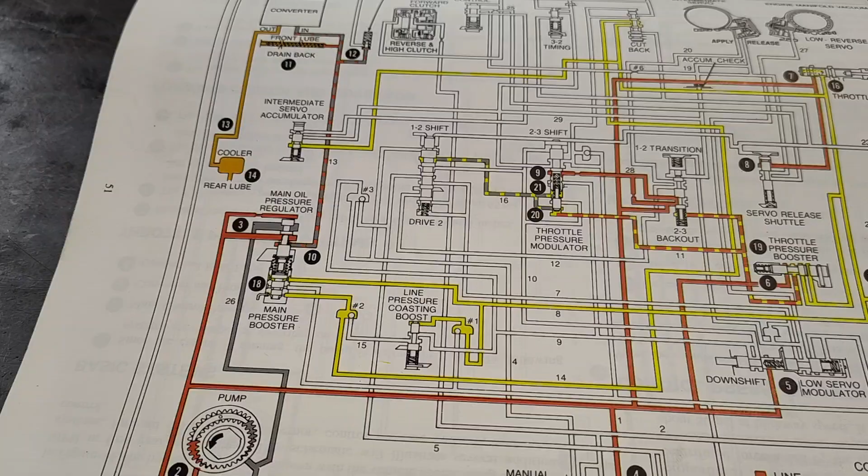And I'll do more, I'll pick this apart as time goes on. We'll do some experimentation with looking at the flow meter and the cooler pressure gauge, and I'll go over what I did or didn't do to the valve body, or even within the torque converter. We could even try experimenting with things by, if you're trying to put a little more pressure in the converter, you could put a little bit of restriction before you get to the rear lube.

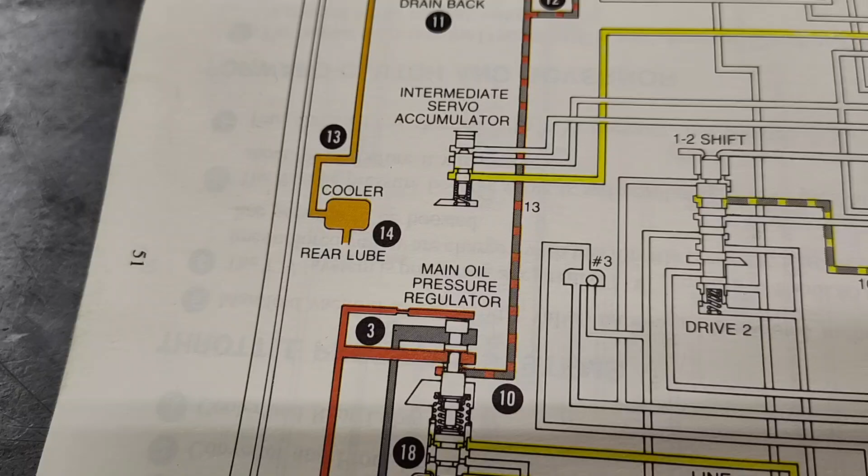You got to be careful with that though, because you don't want to restrict oil to your lubrication system too much, because then you're just going to burn up your planetaries and things like that, which is another thing I've heard of with glides a lot, even C4s too. They start to restrict these oiling systems. Like early C4s, for example, have very restrictive and a crappy oiling system. C4s from the 70s and up were okay, but those ones from the 60s, those oiling systems were pretty terrible.

And you'll find you have premature planetary failure, thrust washer failure, or bearing failure, or whatever it is. So you don't want to mess with your flow going through your lubrication system too much.

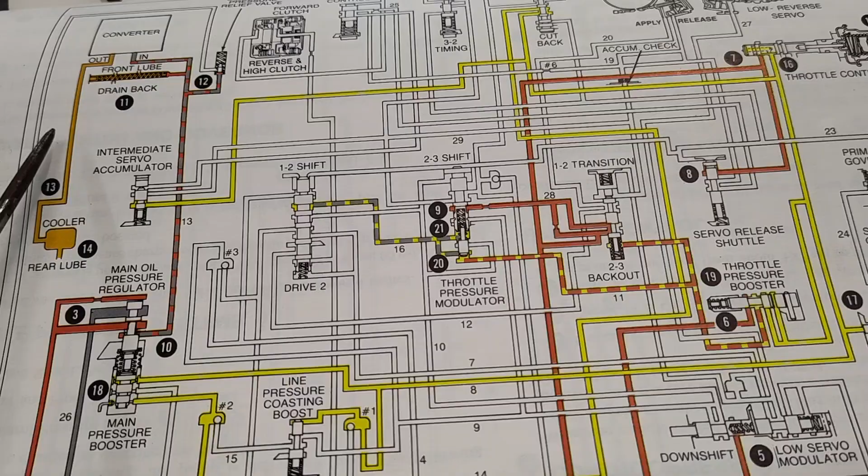What I generally try to concentrate on when I modify these circuits is I try to increase delivery of oil to the torque converter. If my pressure in the converter and in the cooling system is reasonable, and my flow's pretty good or whatever, I can go and add more delivery to the circuit to try to push the envelope here.

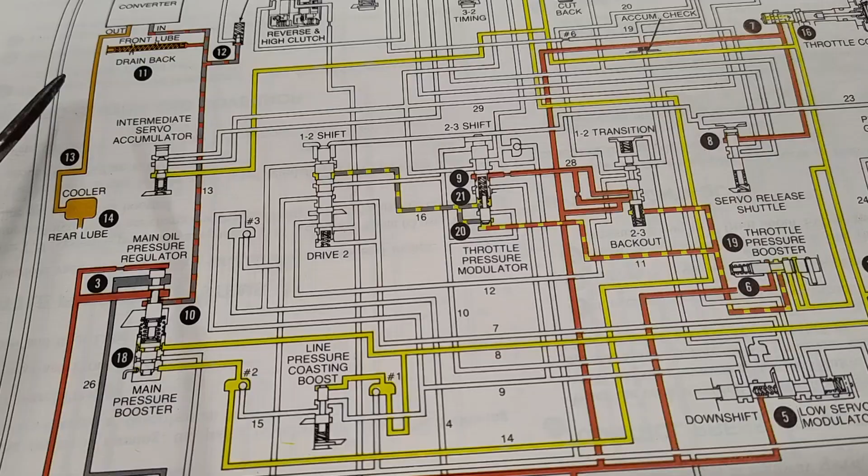Because we're gonna flush nice, fresh, cool oil through the converter by adding more delivery to it, helping it to work better, and then we're gonna have nice oil flow going through the cooler to try to keep things cool, and then lots of oil going to our lubrication system to help the transmission last. And that's the big advantage there.

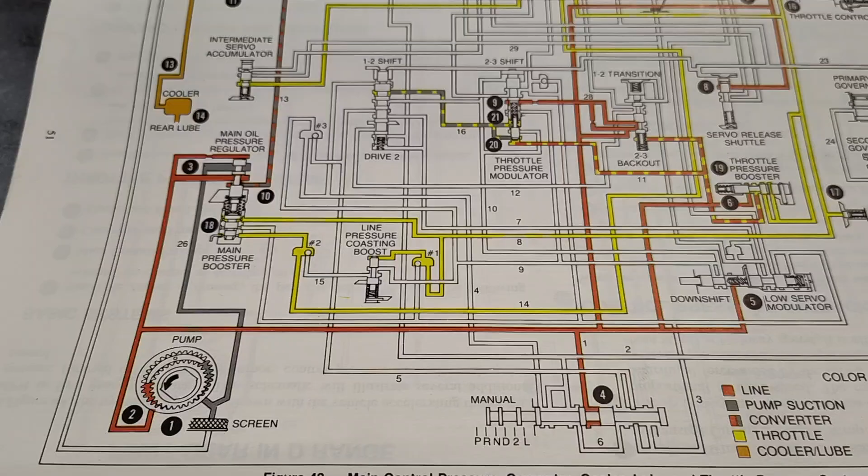Please don't bombard me with emails asking me what to do to your valve bodies and things like that, or if I know if you have this problem or not. I don't, without seeing everything. You'd have to send everything in for me to go over it. I'd have to cut open your converter, I got to look at your total transmission, I need to dyno it, measure things.

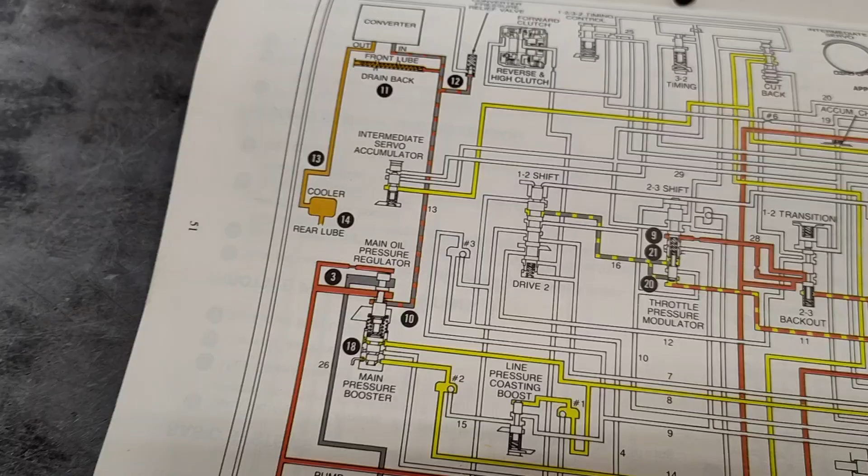There's a lot involved in having these answers for you, rather than just, hey buddy, here's a recipe I'm going to hand you. I might be able to hand a recipe out, we'll do an experimental video on a transmission one day, and you can kind of sort of get a recipe idea, but there's too many transmissions out there and too many variations to just do that.